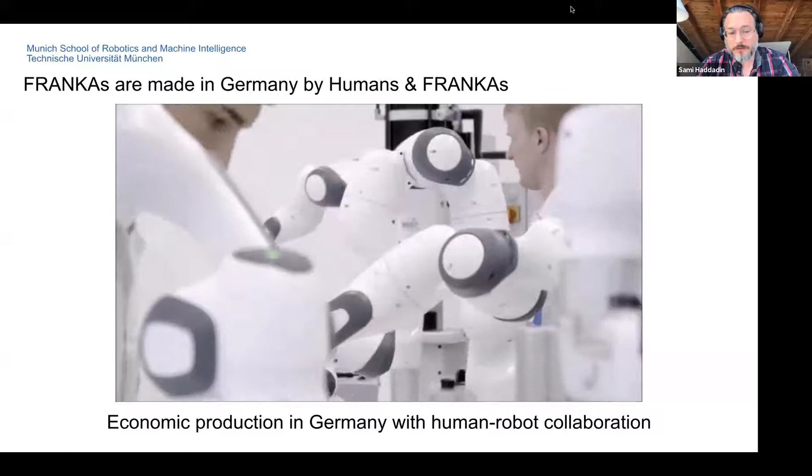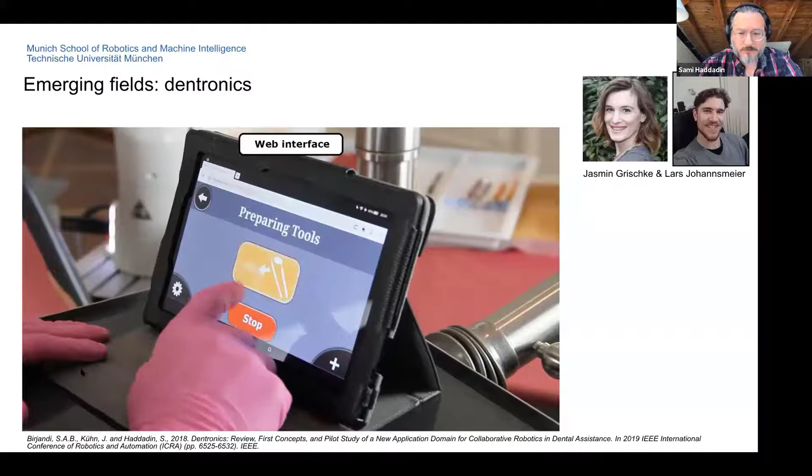I think what is kind of interesting is that these kind of systems also now become more and more elaborate, and other fields are thinking about applying such robots in various domains that I personally could not imagine several years ago. For example, and I'm intentionally showing something that might be a little bit off the typical PHRI domains, a field where robot assistants and medical applications, such as dental care, could be something for the future. This is a short video showing a little bit where things might be going.

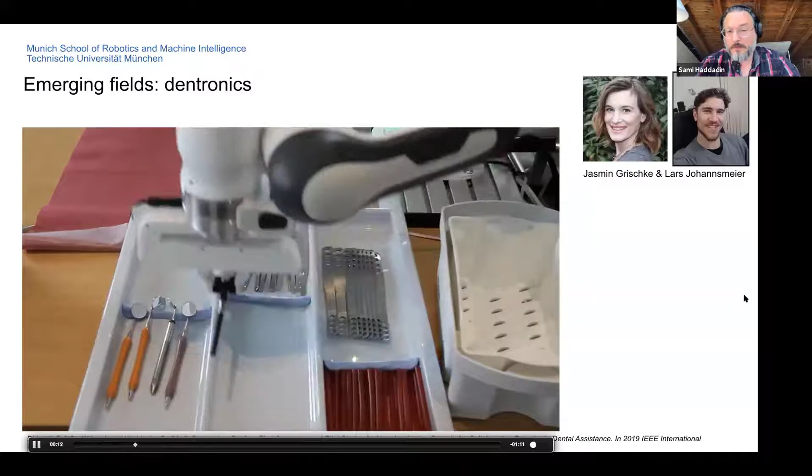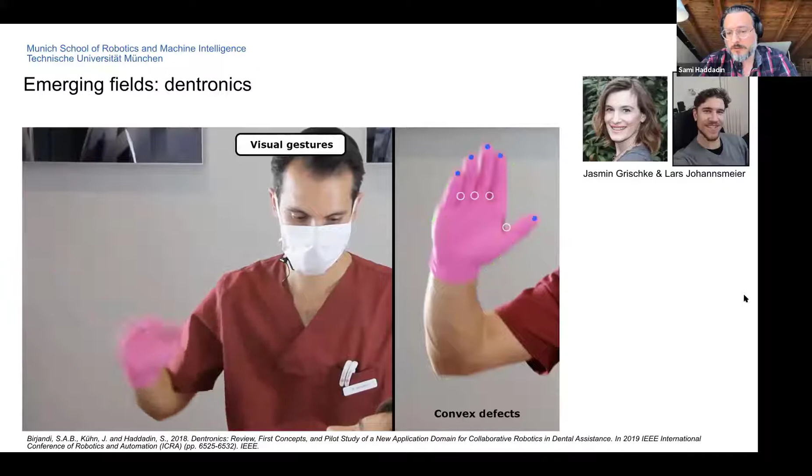For example, having robots really as an assistant to the dentist, there's obviously the necessity of close physical human robot interaction, but also the multitude or multimodal interaction abilities in order to be a tool to essentially non-technical persons, even more than we know from physical human robot interaction in the industrial domain.

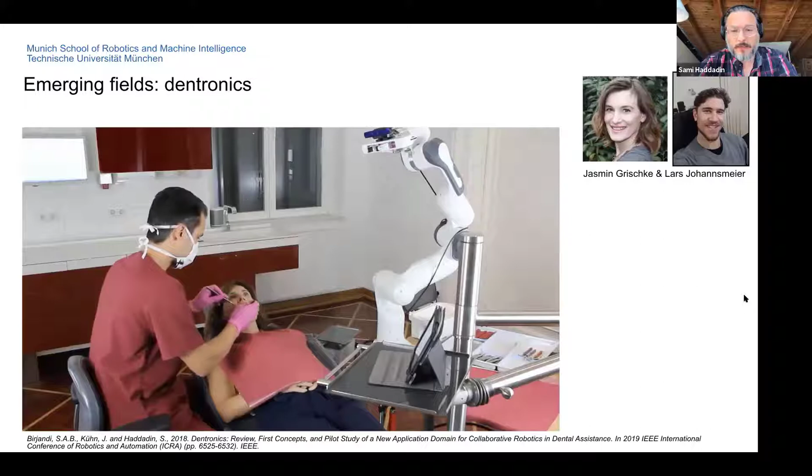So for example, being commanded by a speech interface just to give tools that are to be grasped sensitively and in the rightful way, in order to be handed over to the dentist in this particular example, and essentially being a fetch and carry service that makes it possible to have free hands and to also control the robot yourself, rather like a third hand. So not yet on the level of full autonomy and so on.

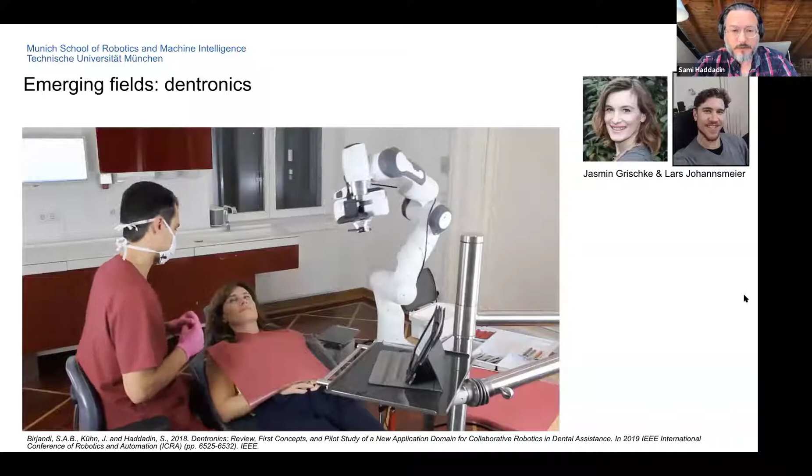However, I think it's kind of interesting that these things can now be done in a way that even totally non-technical people can really do them. I'm trying to run through some contributions that have been done over the years, but also more recent work. So it's a kind of potpourri of various things, just to give you a teaser in the various directions.

I think it's very clear that the first basis that had to be developed was what I more and more call tactile robots, going beyond classical torque control and soft robotics, and more towards partially autonomous systems that have some reflexive and tactile interaction capabilities really built into the core of their control system. We have obviously been pursuing this for many years, far more than a decade, to develop robots that can be grabbed by the hand.

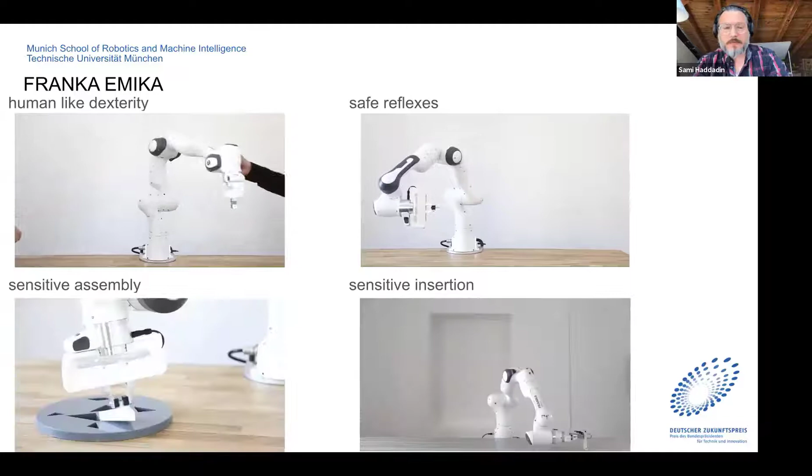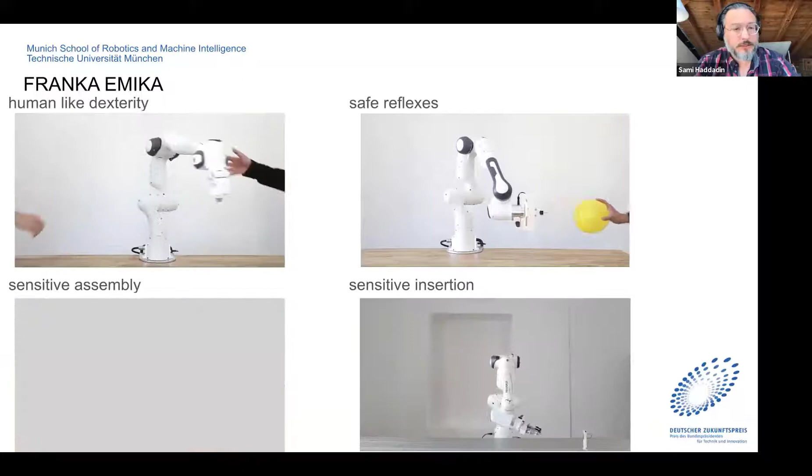You can move them around based on their joint torque sensing and sophisticated control methods, most of it passivity-based control, which makes it possible to have a rather sensitive, safe, and dexterous system that can be used for sensitive assembly tasks, which are still a big challenge.

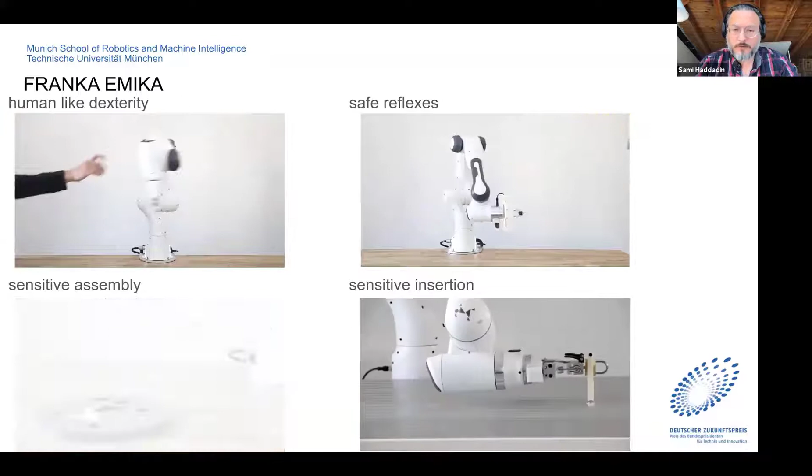In particular, it's a tool that the human teaches, and the robot does certain things in order to autonomously acquire skill. But today I won't talk about our work on skill learning and acquisition, focusing instead on the physical human-robot interaction side of the developments.

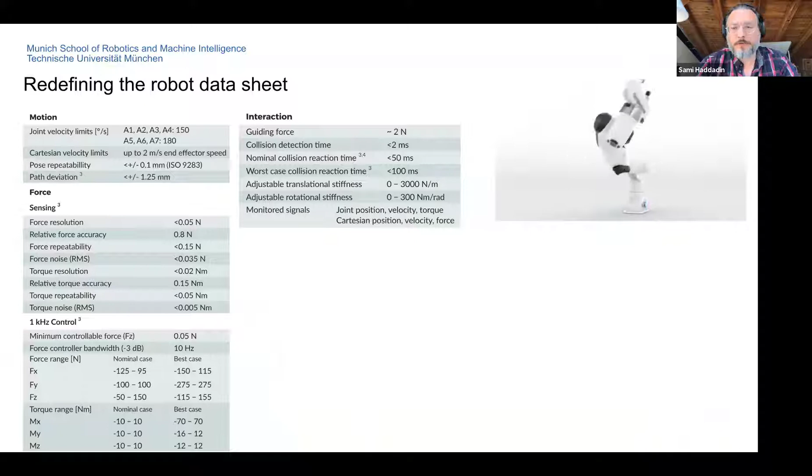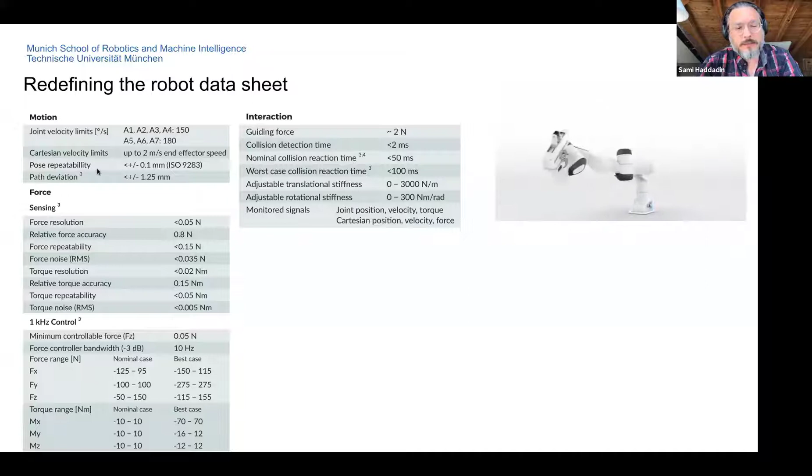What I'd like to point out in the work we've been doing for many years is that it's very important we redefine entirely the robot data sheet. Robot data sheets usually cover technicalities important to industry, but I think it's important we go beyond classical motion tasks—beyond Cartesian velocity, repeatability, path deviations, which are already sophisticated metrics for motion control. We need to think about, define, and objectively compare the force sensing capabilities of systems, and in particular the interaction capabilities.

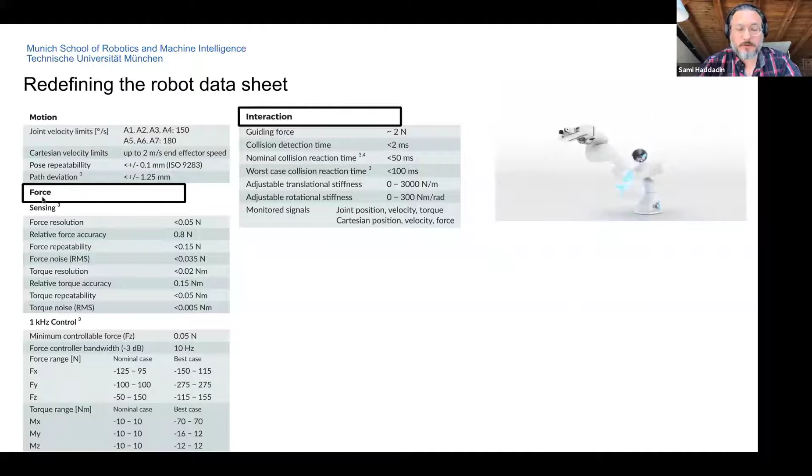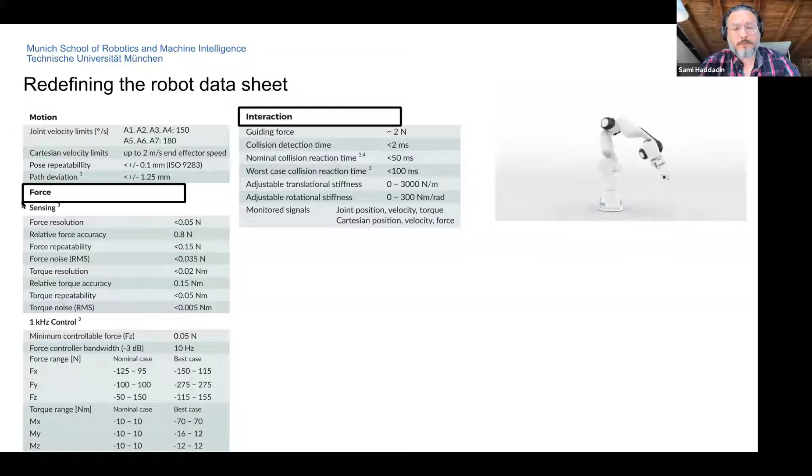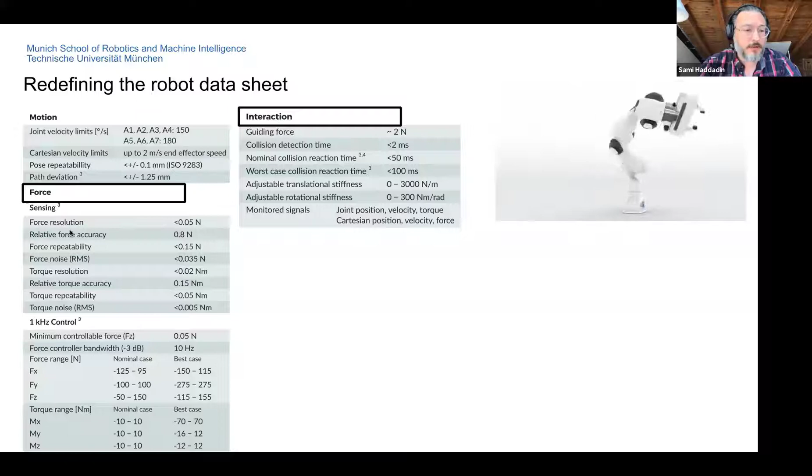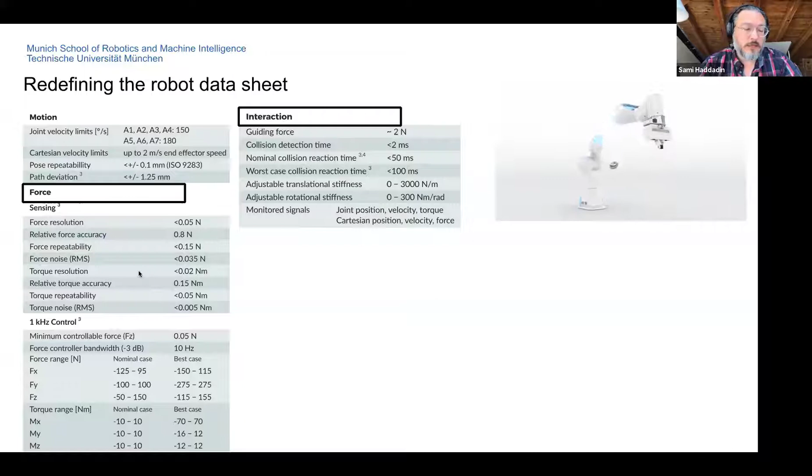By force sensing, I don't only mean force sensing, but also the closed loop control of these systems, and there's still a lot of work to be done. We've proposed some first works here, also commercially, to make robotic systems designed for physical human-robot interaction objectively comparable—including formally measuring concrete application fidelity, for example in force resolution and relative force accuracy. These are things not yet covered by industrial robot standards; no ISO standard covers them yet. We're pushing to have these measured, reflected, and made objectively comparable between systems.

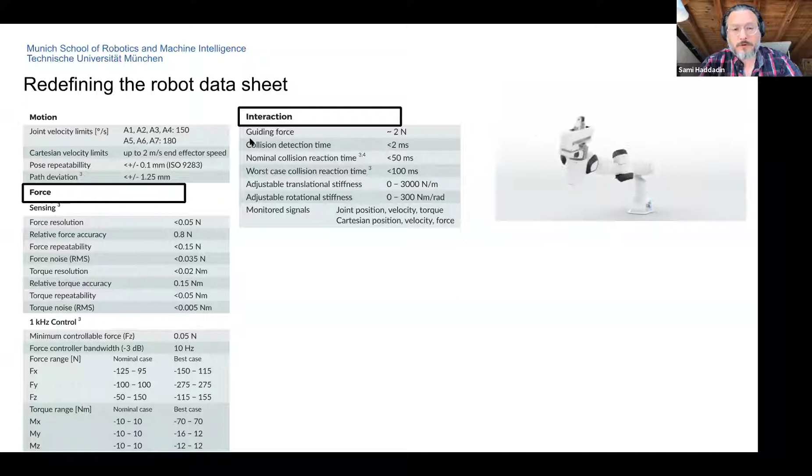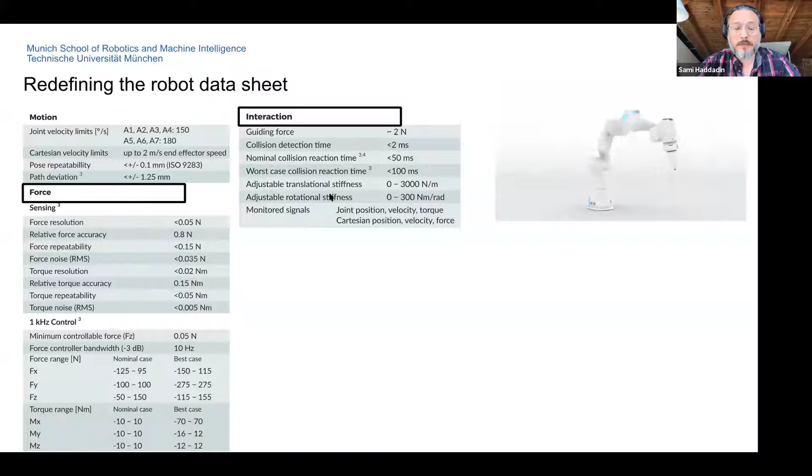This also goes beyond pure force measurement and force control to collision reactions. How do we objectively compare collision reaction? How do we compare worst-case reaction times? And how do we compare overall compliance behavior regarding measurable compliance and deviation from the nominal behavior we'd like to have?

Having said that, I want to jump to collision monitoring, control, and real-time motion planning, to give you a more hands-on, concrete overview of the recent work.

Just recapitulating what we've done in collision monitoring, which some of you may know—work we started many years ago, especially with Alessandro De Luca, also during my time at DLR, developing collision detection and reaction schemes for flexible joint robots based on joint torque sensing, creating real-time collision monitoring methods that make use of typical proprioceptive sensing in torque control systems, with high dynamic ranges in speed and good sensitivity.

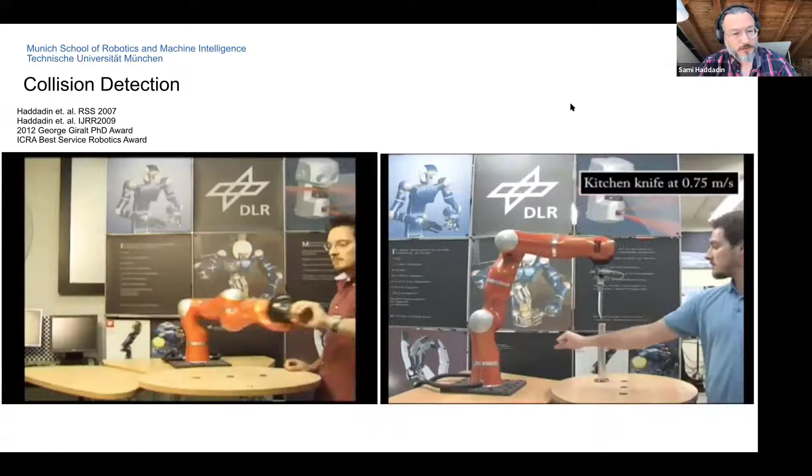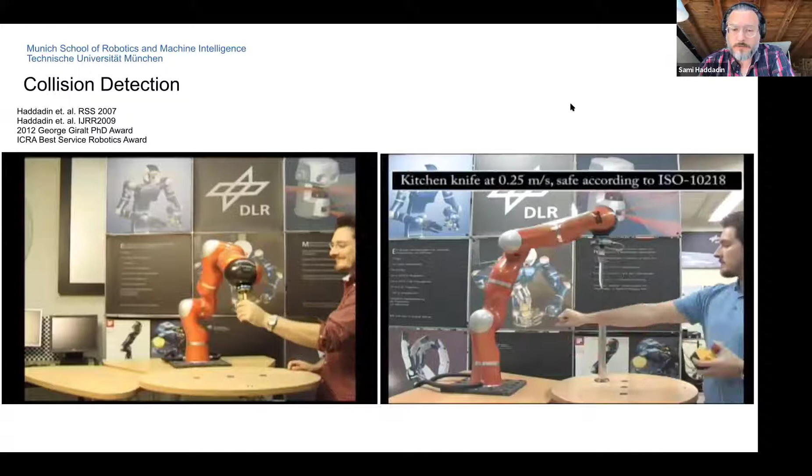What you see here is a video with contact detection and reaction with sharp objects, and on the left side, the high dynamic ranges. The collision detection can be quite reliable even at high dynamic speeds and accelerations, which made it suitable for various applications.

This idea centered around one concept: if we look at the standard rigid body dynamics form, what we're looking for in collision monitoring is the external joint torques in generalized space. To see the joint torques, they're projected by the Jacobian transpose into joint space. However, one fundamental problem used to be that acceleration is not available.

So we cannot algebraically solve it even if we have some joint torque measurements available—let's set friction aside for a second. Even with the full dynamics model, the main problem in high-speed collision detection was usually that acceleration was not readily available. We developed methods with Alessandro that solved this issue to a certain extent.

We postulated the so-called collision event pipeline for collision monitoring, which classifies collision monitoring into various phases ranging from pre-collision to post-collision: first the detection phase, then isolation, which tells you where the contact took place along the structure of the system, then identifying the time signal of external joint torques and possible contact wrenches, and then moving to the higher level of interpreting sensor signals, classifying the intention of the measurement signal, and showing the appropriate reaction.

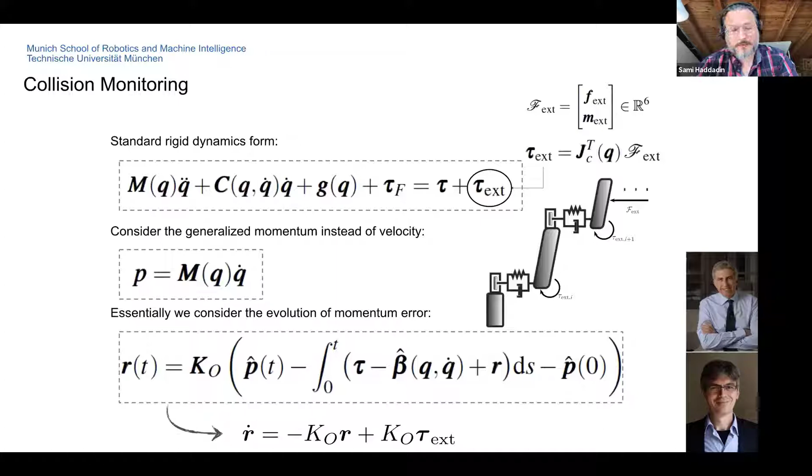The interesting thing is if you look at the transfer function from external joint torques to R, you essentially get a first order constant dynamics PT1 system between true external torques and the residual R, relying on a very good dynamics model, which is kind of obvious, but also on very high dynamic sensing signals, since the filter frequency K_O is ideally set quite high.

So with this, it was not only possible to detect collisions, but to use this generalized momentum observer, with some other kind of work, also for very accurate force sensing at the end effectors. What you see here now is the force resolution from the data sheet I was presenting—essentially having 1/10 of a Newton of dynamic resolution, static repeatability in force.

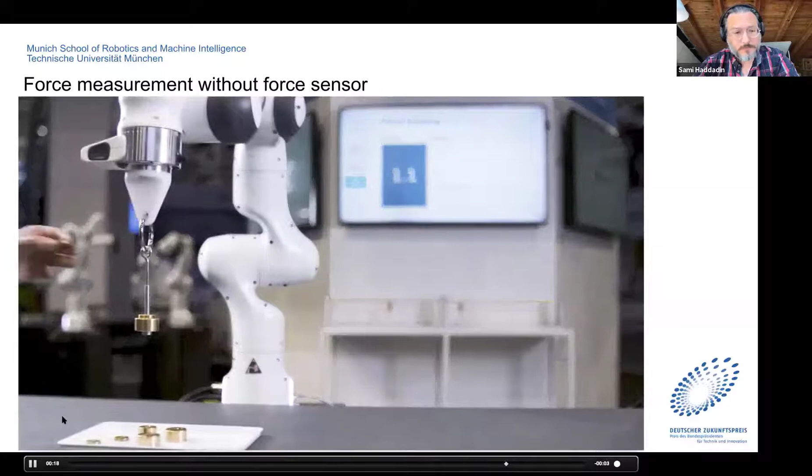And obviously the question about force tracking arises here. There are many things that can be shown that this method really works to a certain dynamic range.

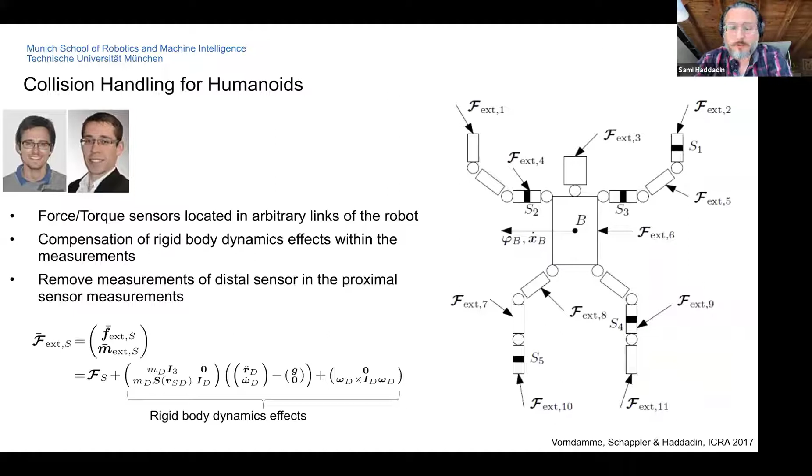This work has also been extended to humanoids. We're currently working on an ICRA paper to really put the whole thing together, but just to give you a current view.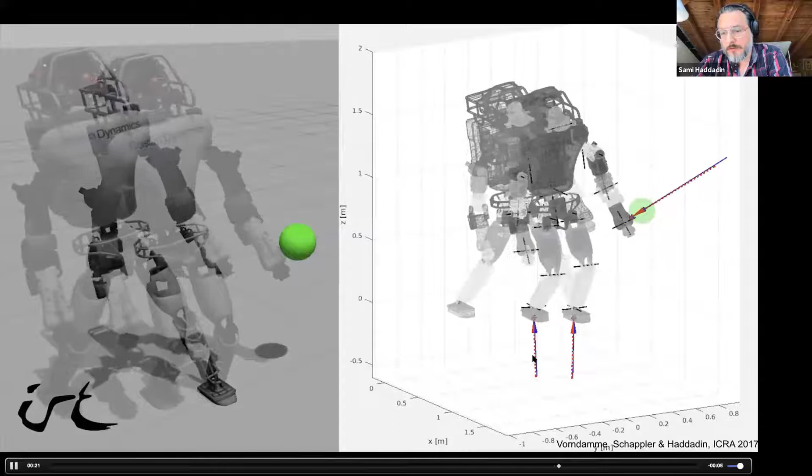This collision detection and reaction monitoring system we developed for static manipulators, but we also generalized it to tree-like structures—having multiple contacts at the different limbs of the humanoid in this example, and being able to monitor the true forces quite accurately, depending on the dynamics of the impact because of the first order filtered behavior, making it possible to generalize also to more complex systems.

However, if we want to go beyond what I was talking about and have a system with even higher bandwidth, higher accuracy and so on, the major problem in what we've seen so far is essentially the problem of thresholding, coming from sensor resolution, numerical differentiation, modeling errors, and so on.

But also the low pass filtering in the first order differential equation is really a problem, and therefore we can get up to 25 Hertz, maybe 30 Hertz, of dynamic range of the filter frequency. However, far beyond that it's actually not really possible, at least not at the current technological status.

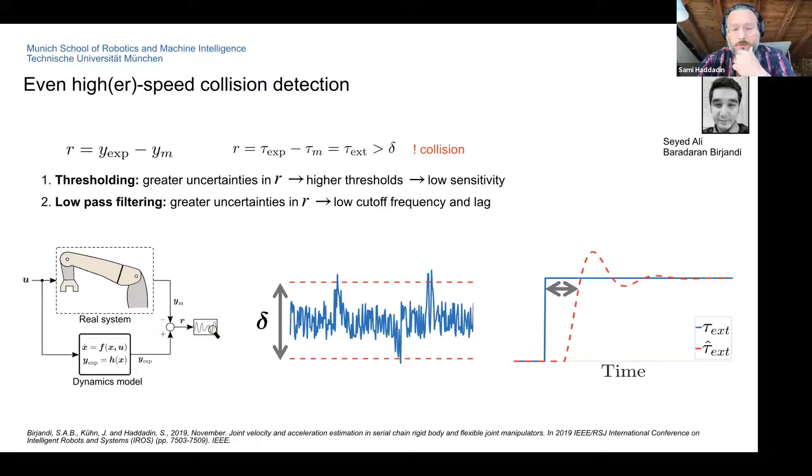So what we've been trying to do is propose a method and see if we can further push the boundaries on high-speed collision detection. The ideal solution, as I said before, is the direct method—algebraically solving the dynamics equation.

Sorry, somehow my cursor always vanishes. I'm not sure I can stop that.

So usually using proprioceptive sensing, we have observer-based methods, as I said, there is this lagged behavior inherently in the differential equation. The direct method would basically solve the algebraic problem instead.

The ideal solution that this would constitute would be very simple to implement—no observer structure, it's straightforward, would have in principle high accuracy and high bandwidth. And the ideal solution would also work with many numbers of sensors.

However, as we know, the problem is that we have the numerical differentiation of the position in the joints twice, coming to acceleration, which is hard to use at all. And we have increased uncertainties in R because of large thresholds in filtering.

So what have we been doing? We actually proposed recently, in a paper published last year, to use IMUs and nonlinear estimators to get very accurate estimates of the velocity and acceleration, and fuse them into an observer-extended direct method variant that is able to achieve at least the same accuracy, probably even more, of the collision monitoring with the momentum observer, but monitor at much higher speed.

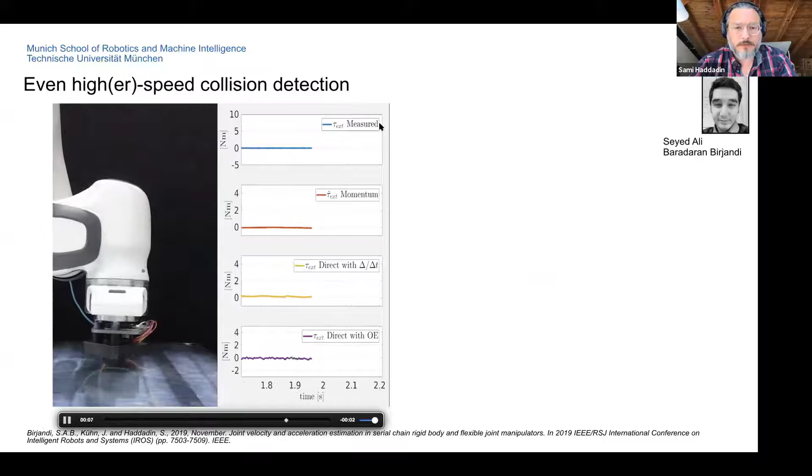What you see here now is, in the first one, the true external force measured, then the momentum-based one with differentiation, so the direct method with twice differentiation of acceleration, and finally the new method that uses basically an extended Kalman observer with IMU, fusing all the proprioceptive sensing. You can see that even the high-speed variance of the signal can be captured by this method, going far beyond the already state-of-the-art momentum-based observer.

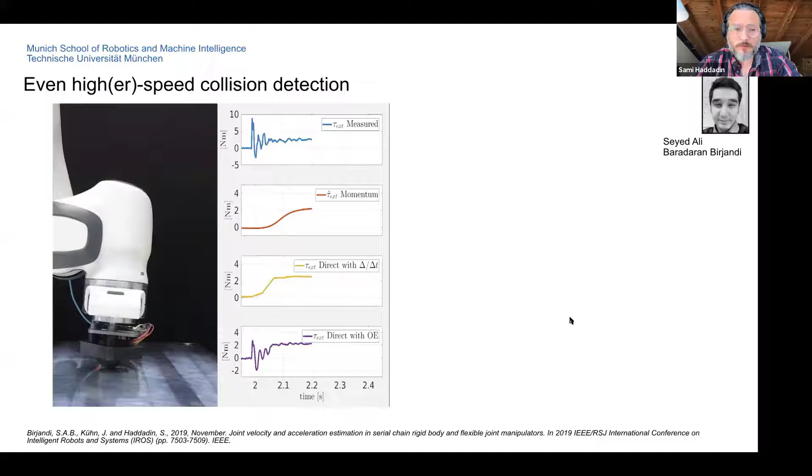This is together with, later on, the collision detection using joint torque. However, on the q and q-dot level, this is a purely kinematic method that doesn't even rely on a dynamics model. So this seems to be a very promising direction to get high-speed collision detection readily available at some point. This is a first result we recently accomplished, and we're quite happy we could resolve the typical issues we usually have with the momentum-based observer.

The third part I want to talk about quickly is interaction control, which probably is also most of what I'm going to talk about.

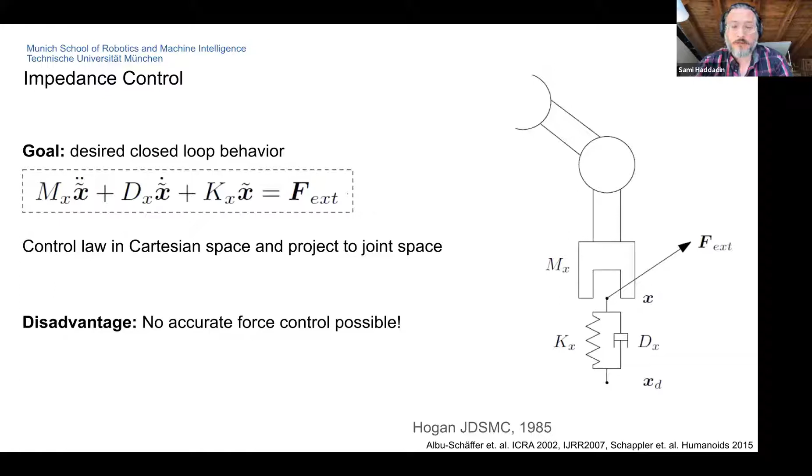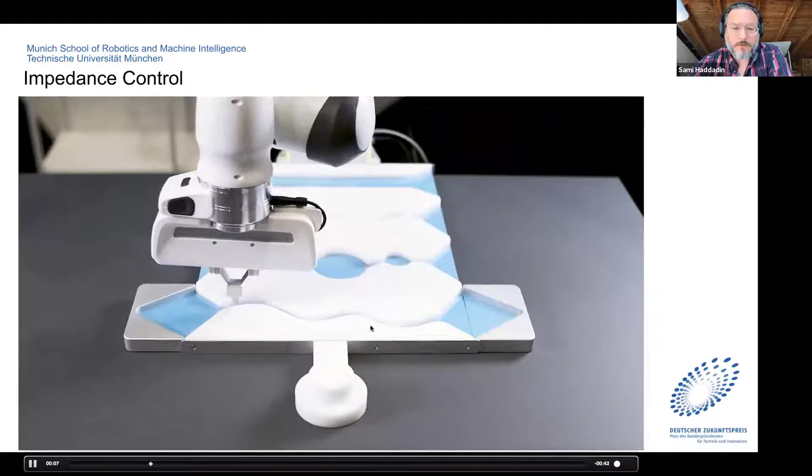We all know the famous work of Neville Hogan. Impedance control is really the general framework we're following, establishing second-order dynamic behaviors between external forces, wrenches, and the overall behavior of the system. With this, we can get quite reliable compliant behavior that gives the robot the ability to move around even unknown curvatures it's never seen before, even in dynamically changing environments.

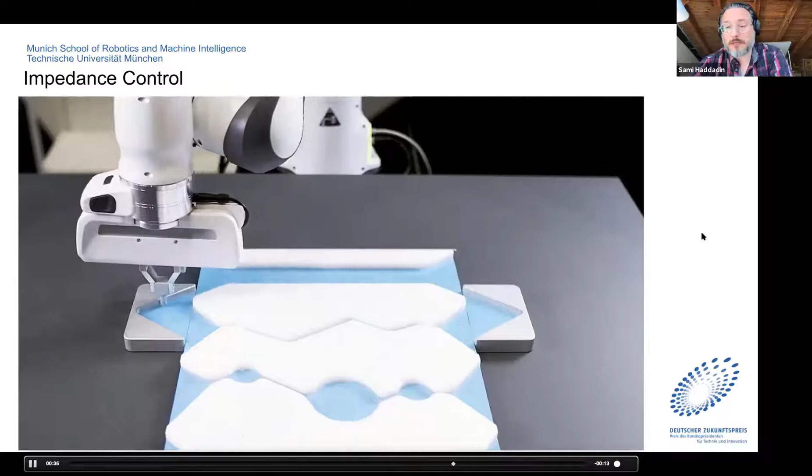I'm just speeding up so I'm not running out of time. Even when the environment is changing, with the right impedance—which is obviously the big challenge—we can get quite accurate behavior.

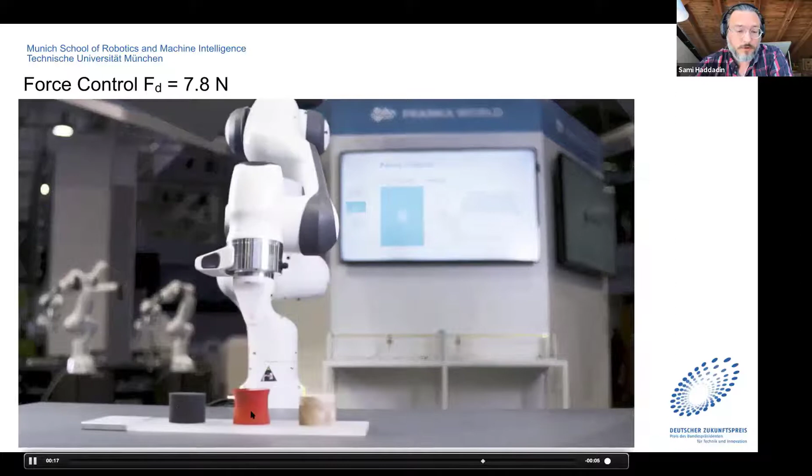Other things we could do, as described before, is the force control question. So only with internal sensing, having quite accurate force control, you could see that 7.8 Newton is the desired force. Even for different contact patterns like foam, rigid rubber, or wood, the robot is able to very quickly converge to the right value.

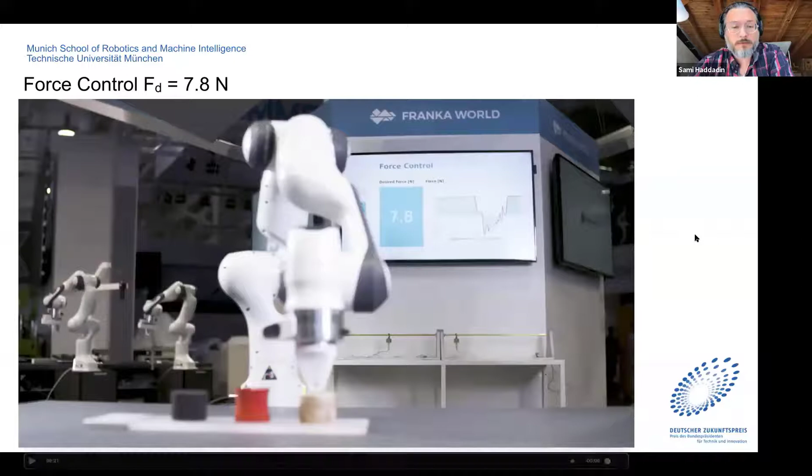Having impedance and force control, there's obviously been lots of work in this direction. However, there have always been some limitations. The nice thing is that force control, even with only proprioceptive sensing, can now be done at quite some bandwidth. This is some force tracking work we've recently been doing, and we can show that only with proprioceptive sensing and the observer-extended torque estimation, we can get up to several hertz of force tracking, at a force measurement bandwidth of 25 hertz.

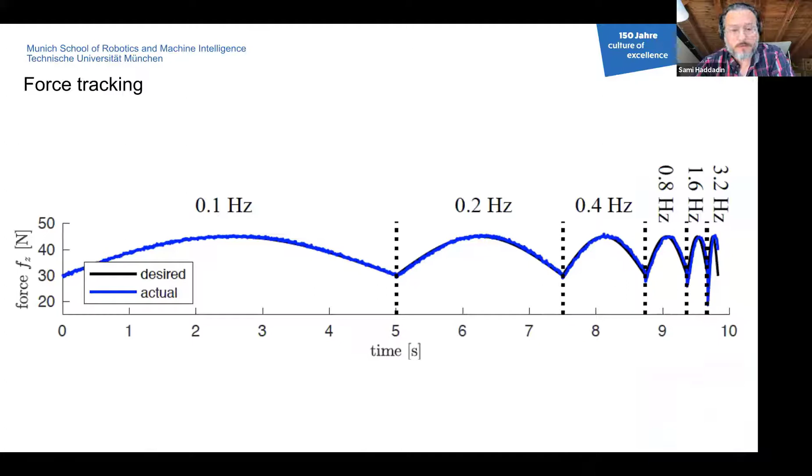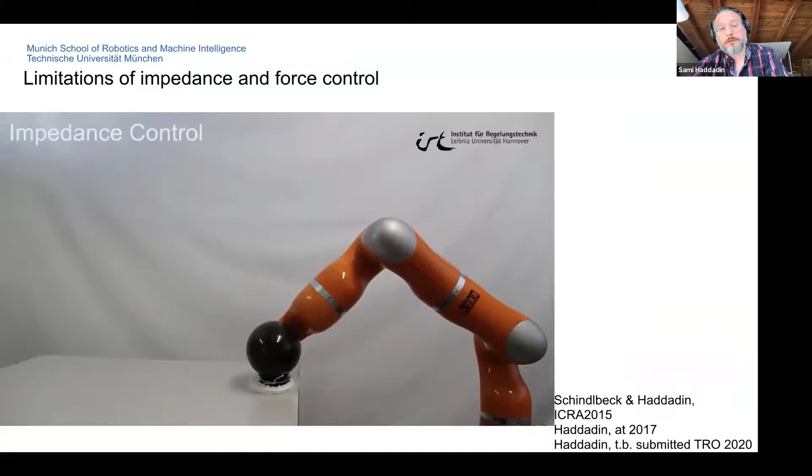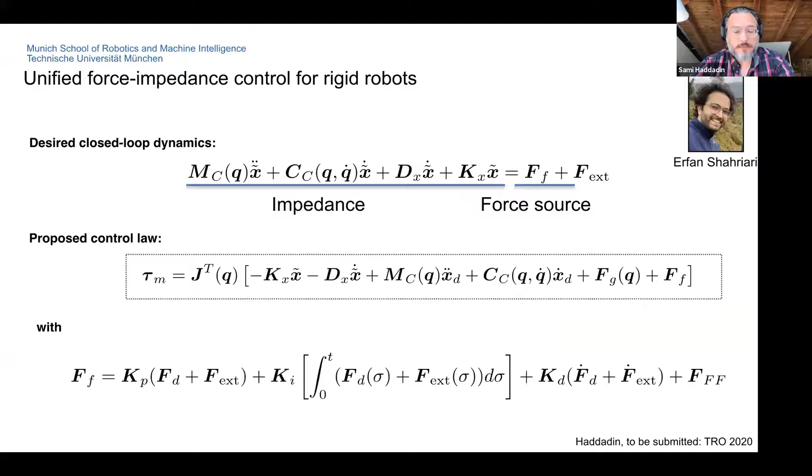We recently proposed, some years ago actually, a unified impedance force controller that essentially starts with a very naive version—a tracking force controller—basically defining a PID control loop that gets embedded into a passivity-based framework by detecting what we call passivity-violating ports, and then augmenting with the well-known energy tank concept to guarantee stability, then adding on top a contact/non-contact stabilization term that together ends up in a passivity-based Cartesian force impedance controller.

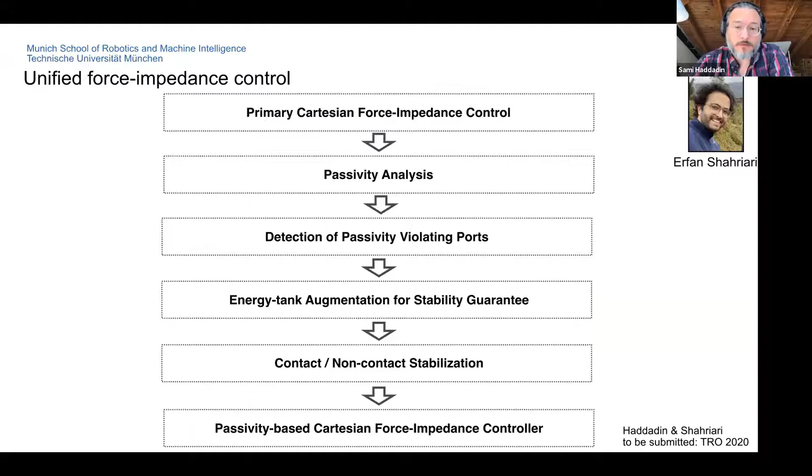The idea is essentially that we look at the storage functions of the tracking system. My pointer is not working, but I'll go one by one. The storage function is the kinetic energy error, the stiffness energy error, and looking at the storage function and its time evolution, we can identify the passivity-violating ports.

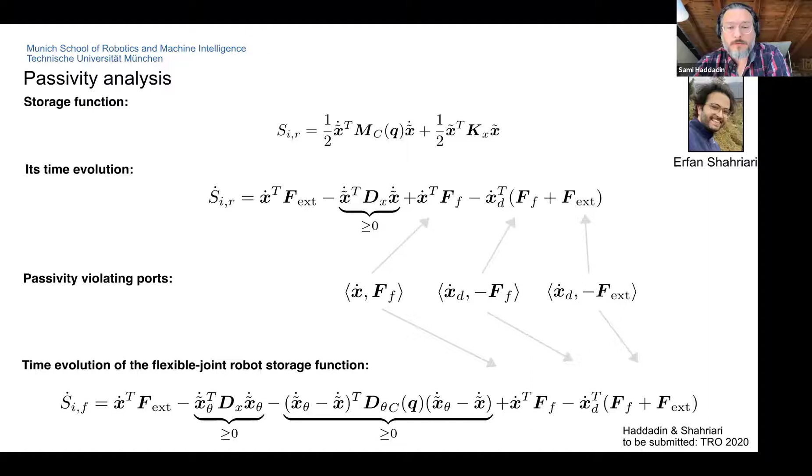These passivity-violating ports are x-dot feed-forward, which is the feed-forward force or desired force of the force controller, times velocity, the desired velocity and the force controller, and the desired velocity and the external forces. Looking at this time evolution of the storage function gives us the possibility to put together an architecture where we can monitor all these possibly passivity-violating ports, and then passivate them with the well-known energy tank concept.

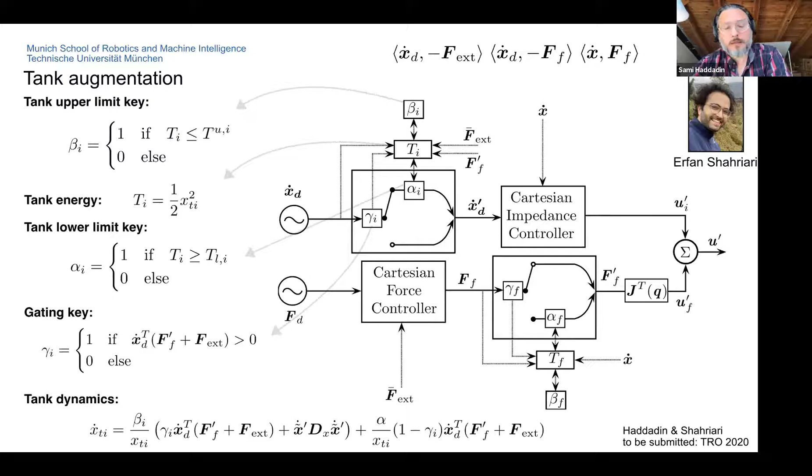I'm not going into details here, but I think it's well known. Obviously there's many things that still need to be done, and I'm going to go into this in a second.

The result is pretty interesting, in that now you can do simultaneous force tracking, even at unknown contact losses. The robot is then able, under the passivity-based framework, to show very stable behavior, not only in terms of compliance, but also in terms of very accurate force control.

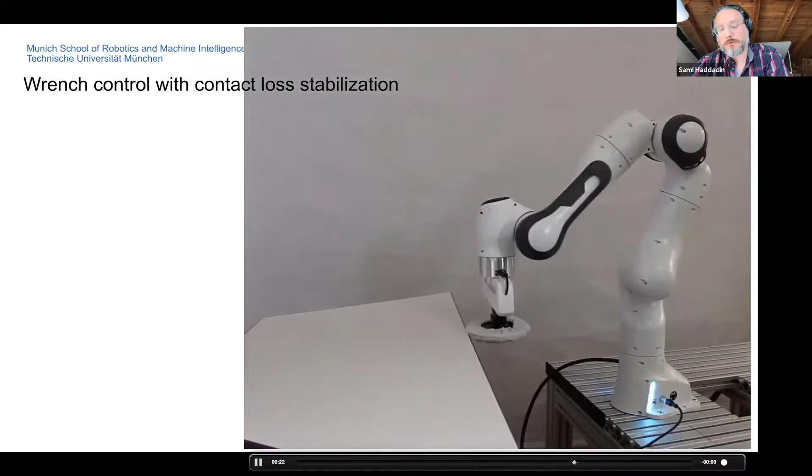So it's actually tracking the forces according to the result we saw before, but is able to deal in a highly stable manner, even with loss of contacts.

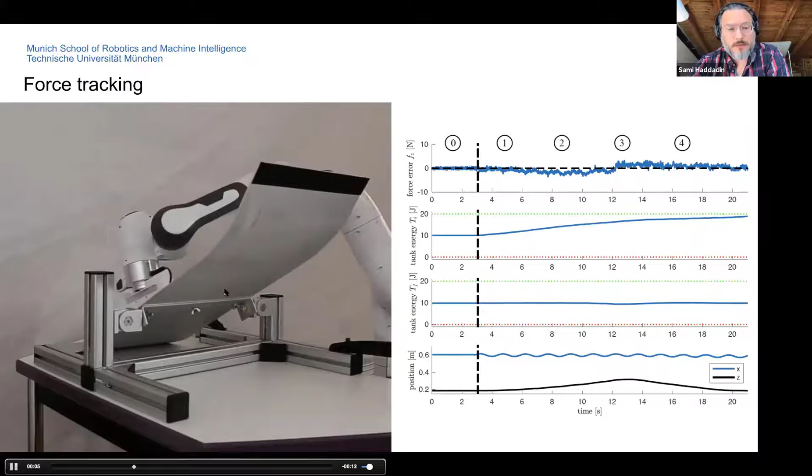What you see here now is basically the result, even when a very unstable environment is trying to be tracked. So the robot has no idea about the environment it's kind of following. What you see here in the upper plot is the force error, even during this.

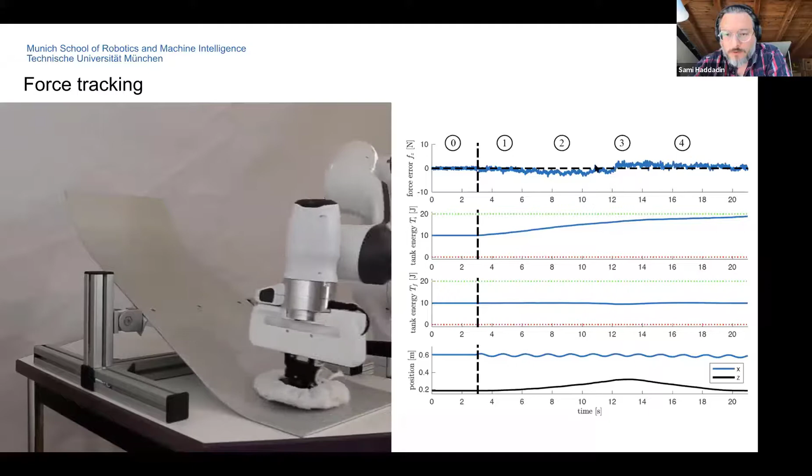You can see the jumps in the environment, but still the robot is able to very accurately track the contact forces up to maybe 1 or 2 Newton, even in these highly unstable and dynamic environments.

However, there is one fundamental challenge, or two in fact, still to be resolved. Yes, we can do virtual energy tanks to ensure stability.

However, it's not yet clear, first of all, the flow between the system and the energy tanks, but also, if we have multiple energy tanks, which part of the task do we want to sacrifice first for the sake of stability?

So we also recently proposed a framework that introduces what we call a valve-based energy tank, plus a gain scheduling approach that monitors the different energy tanks in the system, and then has a gain scheduler that sets this up.

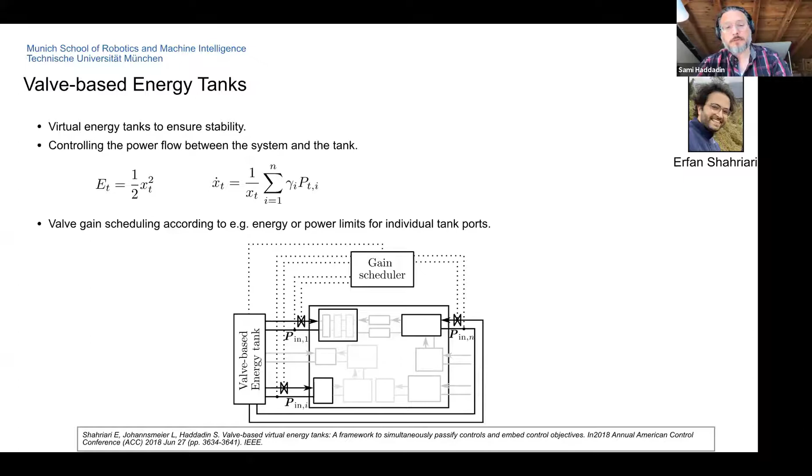This establishes a priority in terms of changing the tasks in a sequential, prioritized order, depending on a user-set preset, obviously.

And then what you can achieve, for example, we see in A, B, C, a robot that is supposed to do a motion task in the horizontal direction, a force control task in the vertical direction, and the human basically pushing on the robot.

The robot moves from left to right, pushing the weight, and as soon as the human releases, the robot tries to track the force control task, using enough energy, or too much energy, so that the robot stops essentially in the horizontal direction.

So essentially this shows that you can now have a framework that is able to weigh and dynamically change the different weights in the particular task setup, and essentially have a passivity-based framework with tanks that is able to also prioritize these different tank distributions.

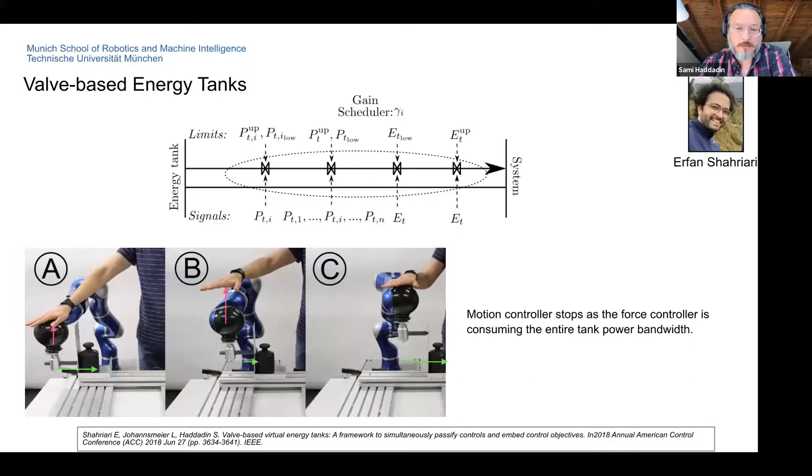This can also be used for reference power learning, essentially meaning that the robot is now not only able to track the task even if it doesn't know the environment, but actually learning the curvature of the system dynamically. Maybe the last part I'd like to quickly go through, for a second, is beyond this desired trajectory: contact learning and collision-aware real-time motion planning.

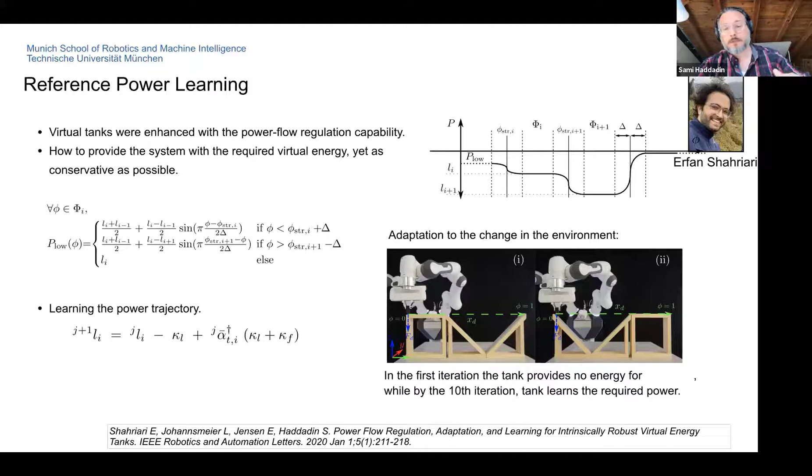That's essentially one of the current works we're doing, trying to capture global predictive interaction of collision scenarios into the motion planning.

This is work together with Czech Technical University in Prague, with Matej Hoffmann and his group. What we've been doing is a local and a rather global evaluation of the current potential collision situations, and trying to put together a system.

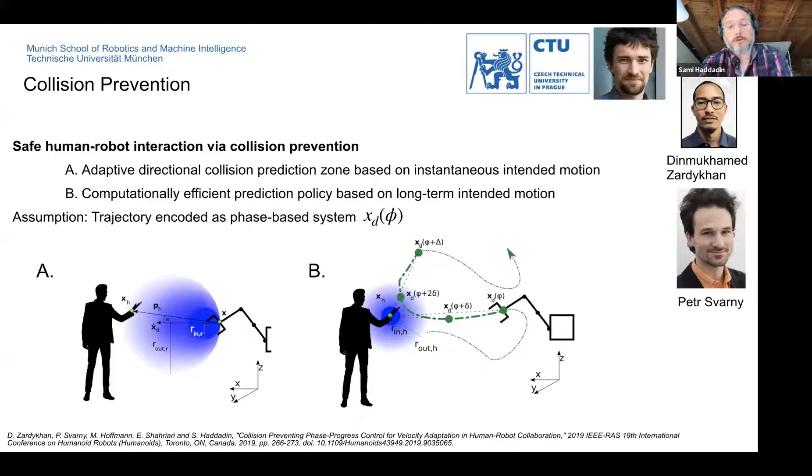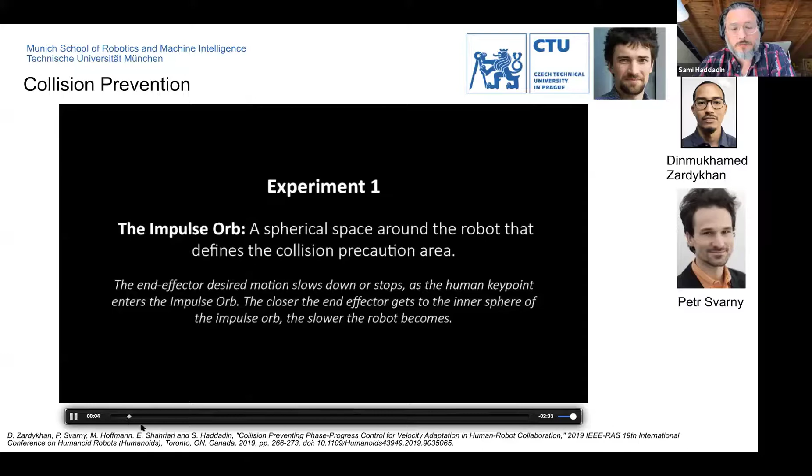I'll jump through this in order to leave time for 1 or 2 questions, and go through the experiment: a system that's able to fuse two methods, looking first at the local behaviors. It's a phase-based controller, so it's compatible with DMPs and other phase-based methods, and can also be integrated into the passivity-based framework.

So it's a system that's able to modulate the phase of the system based on the instantaneous interaction between the human and the robot. That's what we call orb-based phase shaping.

It's really trying to bring everything together into one variable. You could also obviously do it via time scaling, but we chose to use phase shaping in order to be compatible with DMPs and other rhythmic motion frameworks.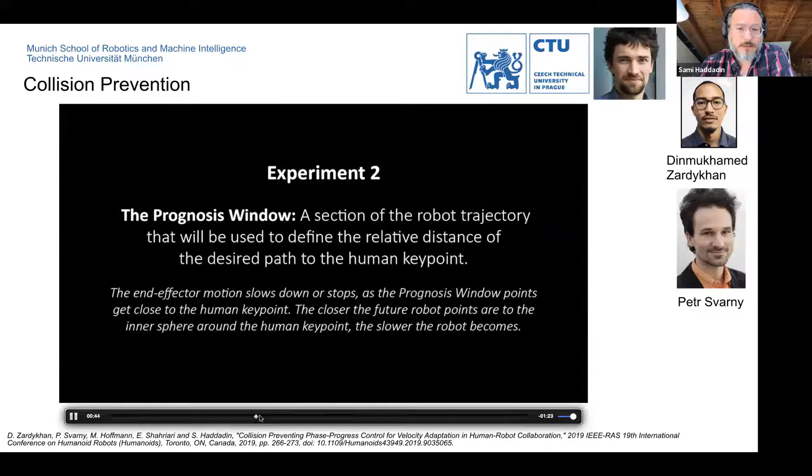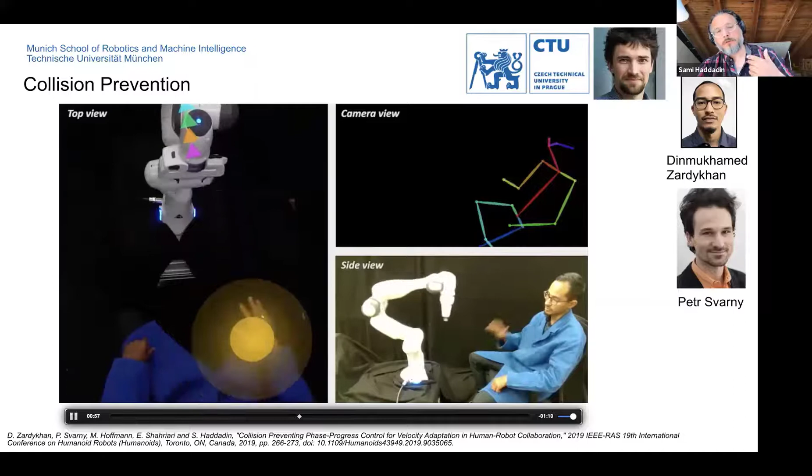There's also the idea to then use global behavioral or global predictive motion, which can be used not only to slow down conservatively, but to be a bit more cautious, taking into account the global behavior, and then fusing these behaviors, as you see in this example.

So if the human is coming too close, in the first scenario the robot would basically be stopping within the prognosis window, the predictive part of the system.

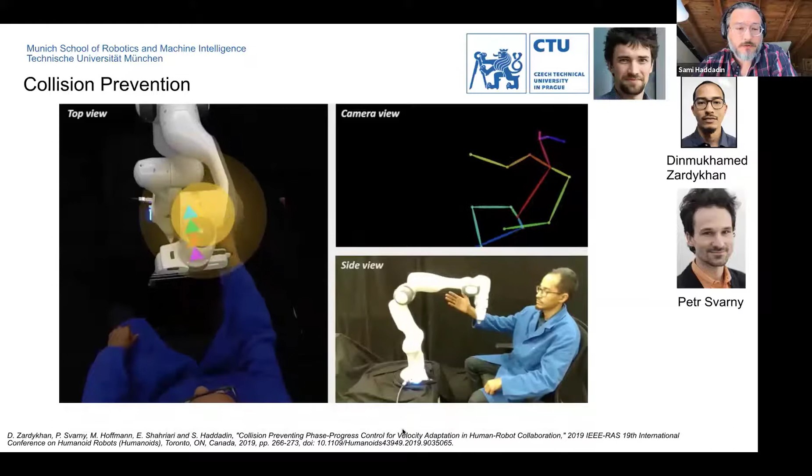The robot could also come into very conservative cases. So what you see here now is basically if the human is now blocking the way, then obviously the robot would not be able to move.

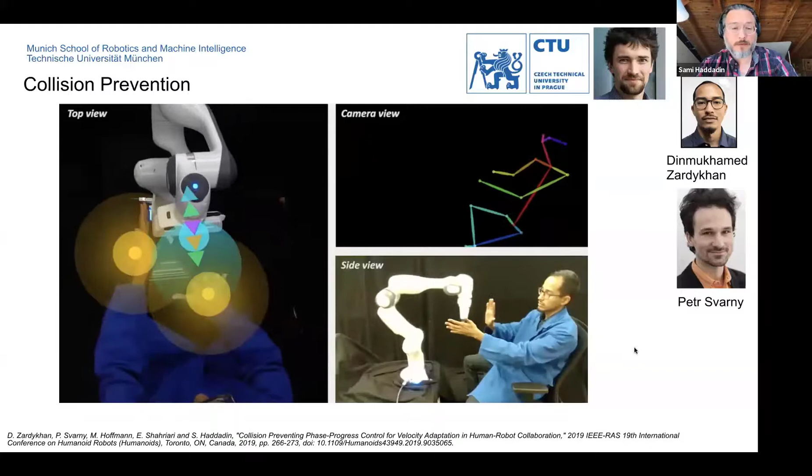We basically came up with a solution that at least relaxes many of these situations by fusing both cases into one and taking the less conservative one. So only if both of them are actually seeing a problem, then the system will stop.

So now you can essentially go into potentially dangerous collision scenarios. However, be cautious only if the problem is really present in both predictors, and then try to basically modulate global properties into a single phase of the system. This is kind of work we're doing now.

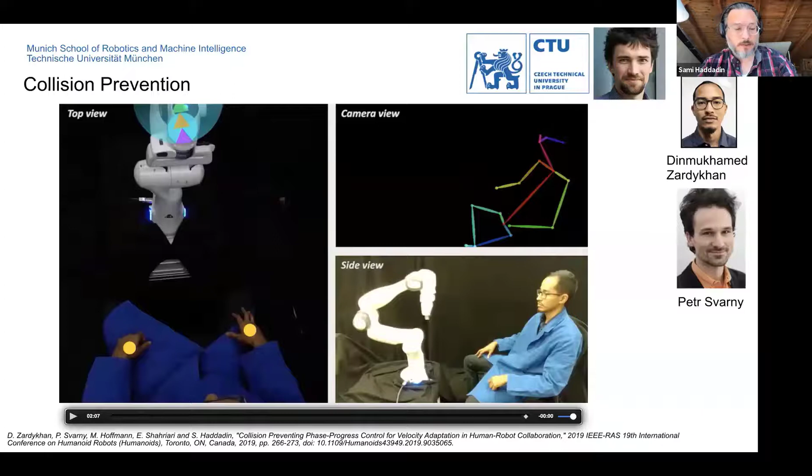I'm skipping that, basically putting it together so that this can be fed back into the passivity-based, tank-based framework, where we then modulate essentially the phase such that it respects energetic requirements from the overall system's energy considerations, and then try to bring everything together into one single variable that is able to control the system also on trajectory phase level, matching nicely with the passivity-based framework in control.

Okay, and I would like to thank all the many collaborators, and probably I'm missing many of them, and also the many supporters from funding agencies. I hope we still have time for one or two questions, and thank you very much for your attention.

Thank you very much, Sami. Really interesting talk as always. We have a couple of questions, but due to some time constraints, I will just ask one if that's okay with you.

One of the questions, also reposted by several others, came from Chiro, who asks: in what you call the isolation phase within the collision monitoring pipeline, don't you think that identification of the contact point is still a challenge using only proprioceptive sensing? It follows that you can identify only the link where the contact is happening, right? And how about multiple contacts? How could you tackle this problem?

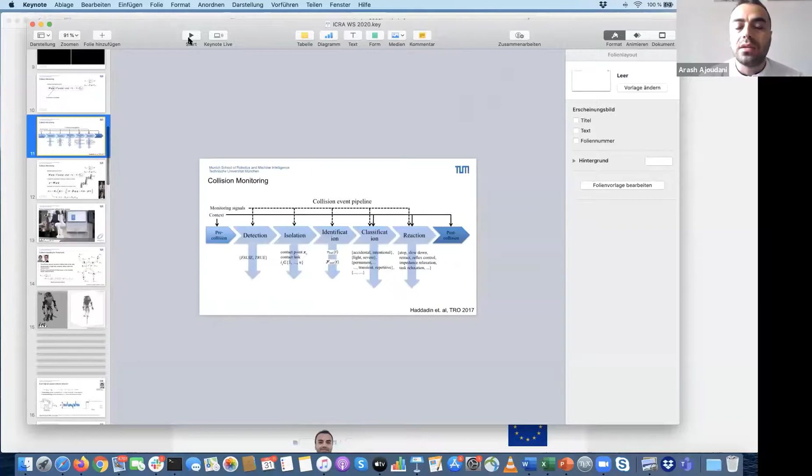Okay, Chiro obviously has a very good point here. I think what is important in the collision monitoring framework is that it doesn't depend on the particular sensing setup, but is rather a general framework. Obviously, detecting and isolating collisions, or multiple collisions, including ones that are absorbed by the kernel of the Jacobian, you essentially cannot see, and this depends heavily on the specific sensor setup.

If you take only standard measurements, there are severe restrictions. The more joints you have, the more you can see, but not many contacts. This is exactly what our paper will be about, which we hope to publish this year: telling you for tree-like structures, given a sensing setup, including placing multiple force torque sensors, how many contacts can you see, where can you see them, and so on.

But I think in general these are two different questions in a way, and they come together if you try to say, given my current method, how many of these parts can I actually answer? So for isolation, if you have six sensors, the question is, what kind of contacts are you dealing with? Are you dealing with force contacts only, as in typical collisions, or do we deal with full wrenches? Then we need more degrees of freedom in the contact to see it.